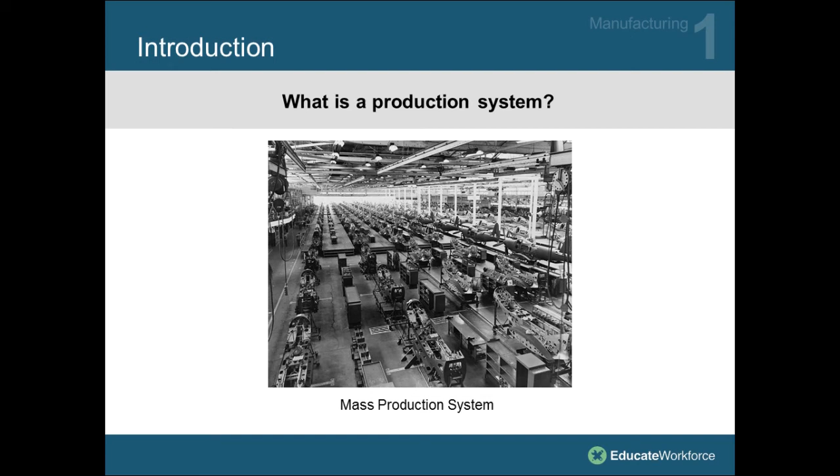In this section, we will discuss some of the various production facilities and learn about the role of quantity ranges in production. Upon completion of this section, learners will be able to analyze and assess different types of production facility layouts and discuss impacts of production quantity.

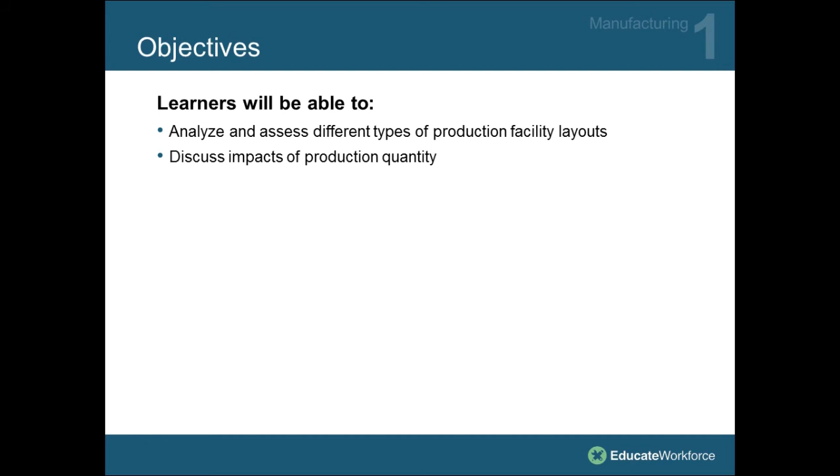Every manufacturing company has a manufacturing system, or the logical grouping chosen for the plant's manufacturing processes. All the other services in the factory, including design engineering, quality control, research and development, and transportation, are interconnected in order to support the manufacturing system in the production of goods or services. These subsystems, though useful, do not directly generate products. This is the responsibility of the company's manufacturing department.

Production facilities represent both the physical equipment and their arrangement in an enterprise. Therefore, production facilities include the plant's manufacturing systems. The efficiency of production is highly related to the facility's design and location. For instance, it would make little sense to open a laundromat far from any residential community or a wood processing plant 100 miles from the nearest forest.

There are multiple different facility layouts that can be used for manufacturing systems. Over the next few slides, we will discuss process layout, product layout, and fixed position facility layout.

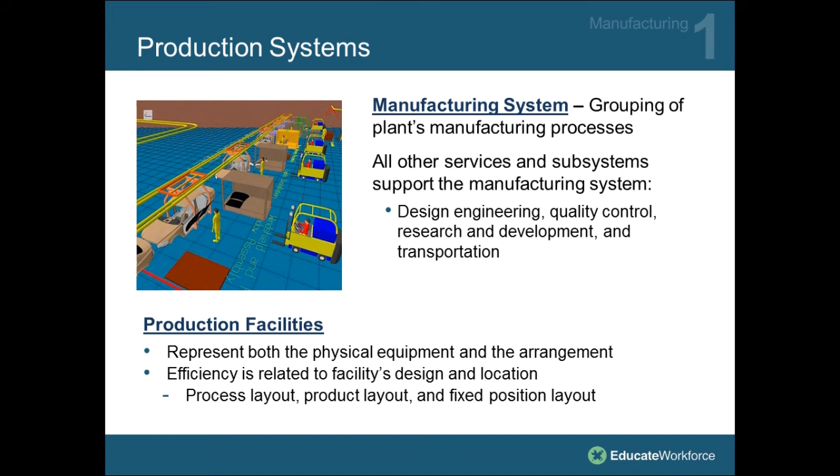Process layout, also called job shop, is a facility layout strategy in which the grouping of equipment and personnel is based on the related process. In this type of layout, equipment is grouped based on the activities being performed, for example, a drill department or stamping department, instead of a product's production sequence.

Advantages of a process layout include greater efficiency through increasing economies of scale, human resource benefits because the company can hire employees specialized on a particular process, and keeping production jobs relatively contained. Disadvantages of a process layout include less flexibility in specific product customization for a given consumer, and the total expense for each station is greater as each will require a full set of tools or equipment to manufacture the product.

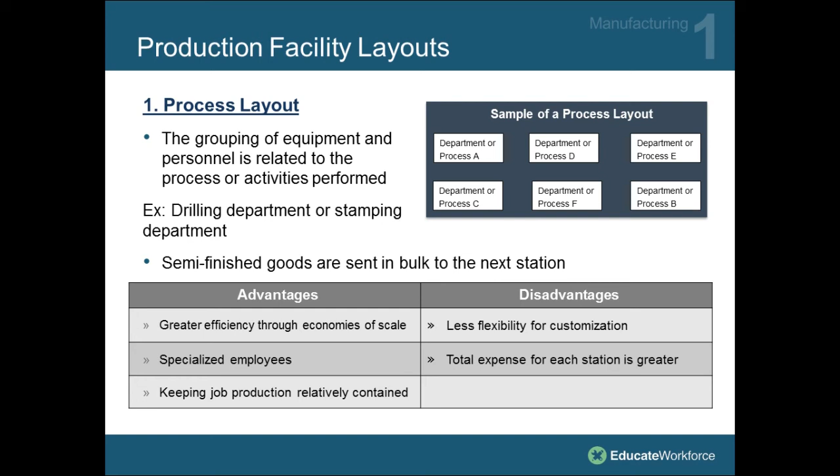The example shown on the right of this slide is a sample of a process layout. Note that the department, equipment, process is not sequential. Also, the layout assumes that all departments or processes are in one facility, and it is important to note that it is not always the case. In a process layout, the semi-finished materials may have to travel a short or a great distance to arrive at their next production area.

Product layout is designed to accommodate large production of similar products. It is frequently used in assembly line types of plants, such as the automotive industry. An assembly line is an arrangement of machines and workers into workstations so that the product being manufactured passes sequentially from one workstation to the next until completion, usually while being carried on a conveyor belt.

Advantages of a product layout include increased productivity and a high rate of output and reduced unit costs. Also, product layouts allow for greater labor specialization with lower material handling costs. Disadvantages of the product layout include inability to be flexible to changes in volume. There is a higher probability of a whole system shutdown, and employees may begin to find the jobs dull or repetitive.

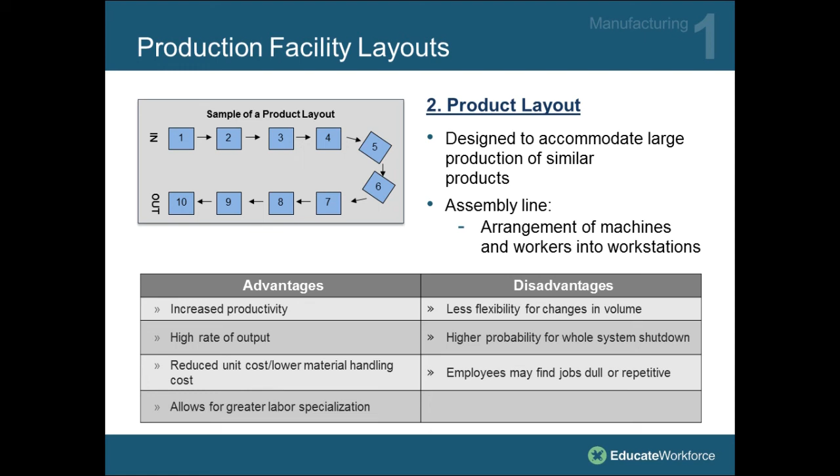A fixed position layout is one in which the product does not move. It is either too bulky, large, or fragile, but the workers and equipment gravitate around it. This approach is used, for example, in the construction of ships or bridges. Workers in a fixed position layout site are typically highly skilled at performing multiple specialized tasks.

Advantages of a fixed position layout include less material handling and high flexibility for changes in customization, volume, and design. However, disadvantages of fixed position layouts in many cases include having less space for production and greater administrative duties in managing the manufacturing of a product in its entirety on a single site.

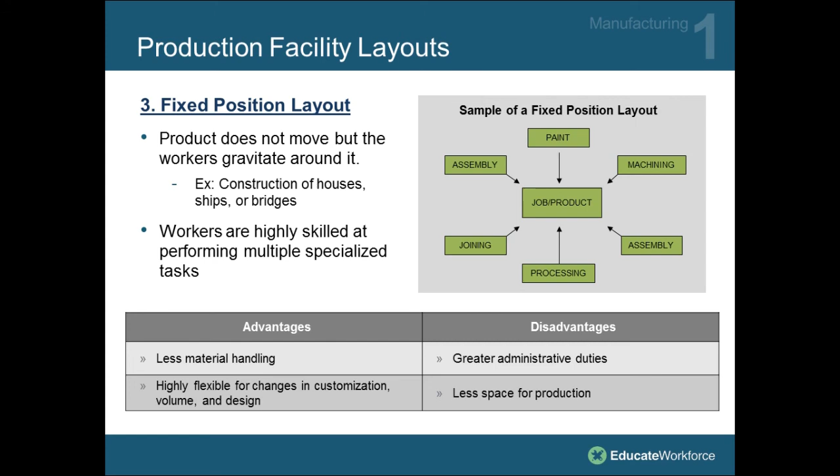As noted earlier, the quantity produced by a plant affects the design of the facility. It also influences the type of manufacturing used and how it is organized. Therefore, production quantity is an important concept associated with production systems. Production quantity is defined as the number of units produced annually by the company. This concept is distinct from production variety, which indexes the amount of different products manufactured by the company.

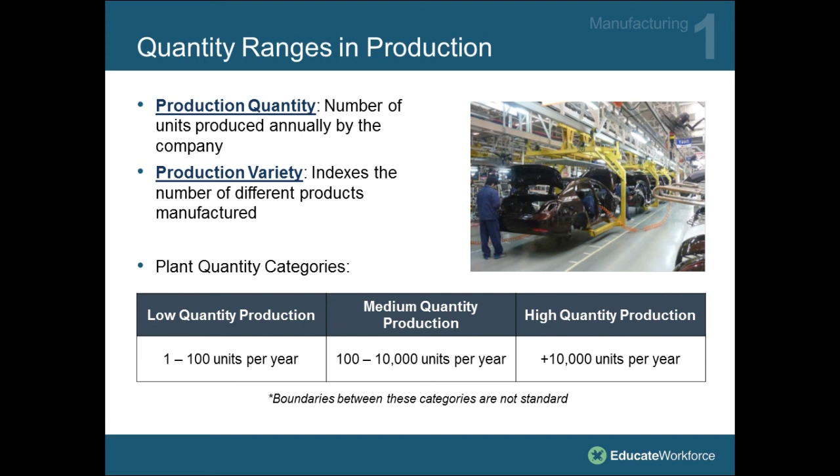The plant's production quantity will fit into one of three categories: low quantity, medium quantity, and high quantity. However, it should be noted that the boundaries between these categories are not standard and vary from company to company. Each of these categories is explained in the following slides.

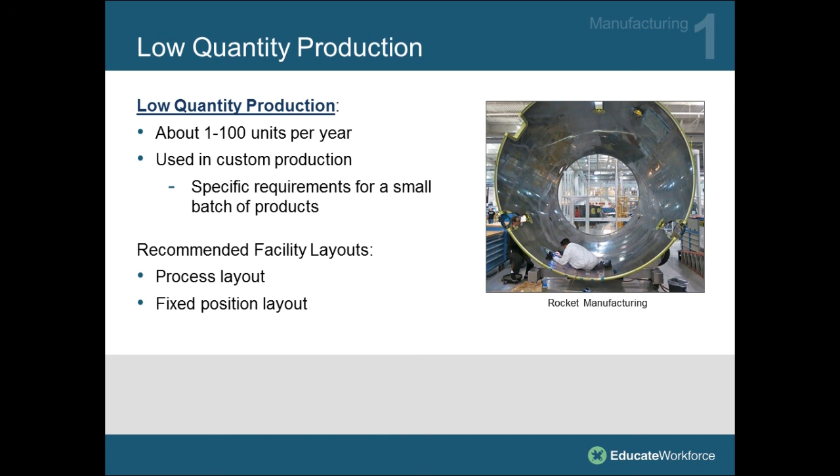Usually, when a plant's production falls between 1 and 100 units per year, it is said to generate a low quantity production. This is generally used in custom production, where the product is made to fit very specific requirements. This type of production suits a process layout or a fixed position layout depending on the size and weight of the product.

A medium quantity production refers to a production of 100 to 10,000 units per year. It is supported by one of two types of process layouts depending on the product variety. Batch production is a type of production where products are manufactured in groups or batches instead of in a continuous stream. In batch production, large inventories are created at each station in advance. This type of production is used when large machines are involved, for larger quantities of goods, and for significant variations between product batches.

Cellular manufacturing is a production layout where cells, workstations, equipment, or groups are designed to support the efficient flow of materials or products between each process in production. Cellular manufacturing is typically used to process one product at a time.

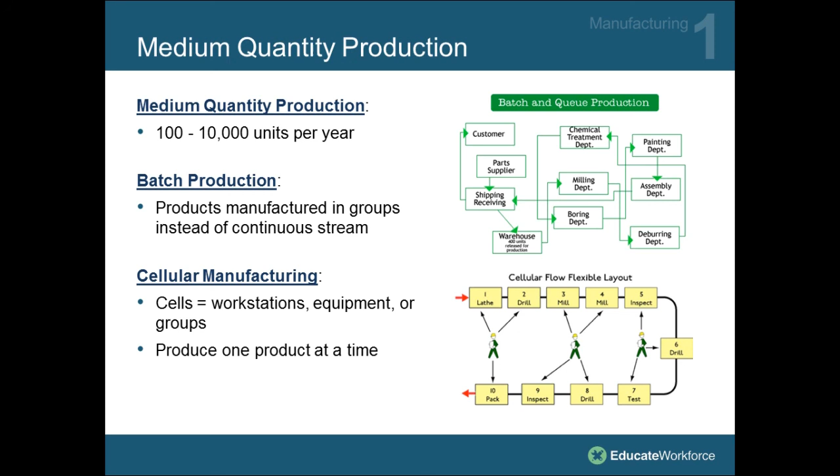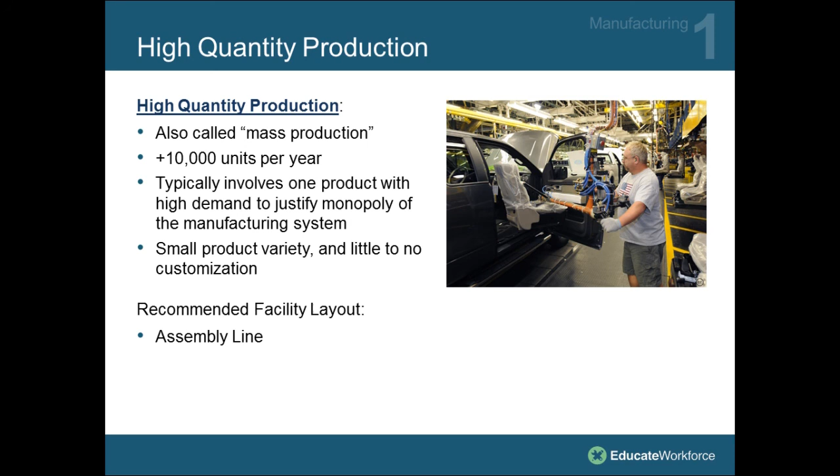High production, also called mass production, refers to any production annually surpassing 10,000 units. This production method typically involves one product for which demand is high enough to justify monopoly of the manufacturing system. Typically, high-quantity production companies have a smaller product variety and create very standardized products with no customization. Assembly lines are often used in this type of production, which aims to increase productivity and consistency of quality while reducing production costs. This cost reduction is mainly achieved through reduction of idle time in the plant and standardized processes.

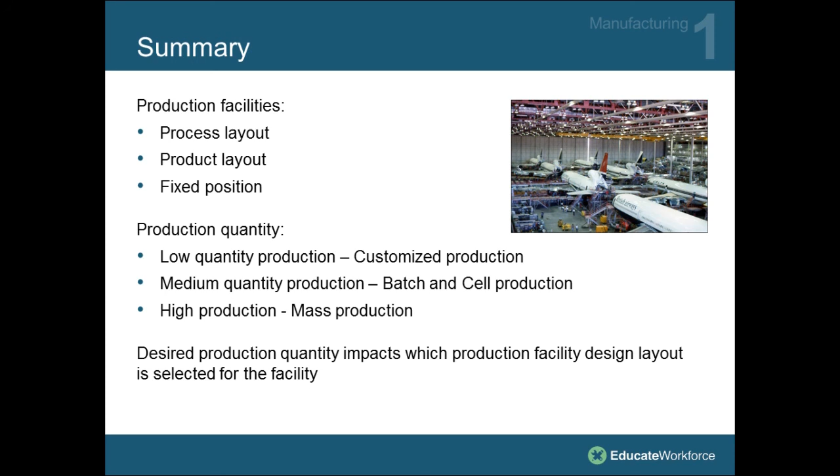In summary, production facilities represent both the physical equipment and their arrangement in an enterprise. Most manufacturing facilities have process layouts, product layouts, or fixed position layouts for their production systems. Production quantity is an important manufacturing term to understand, as it is associated with the annual output of the company. It affects the design of the facility and also influences the type of manufacturing used. Understanding these basic concepts of manufacturing will help you understand how different types of manufacturing facilities operate.